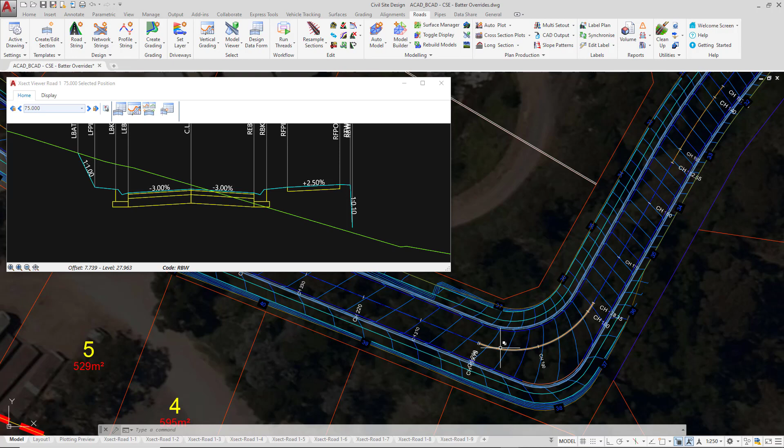Now, what we'd like to say is that between chainage 190 and the very end, we would like to have, instead of a 1-in-1 slope, 1-in-2 instead. This is really just to show you how this particular entry would work.

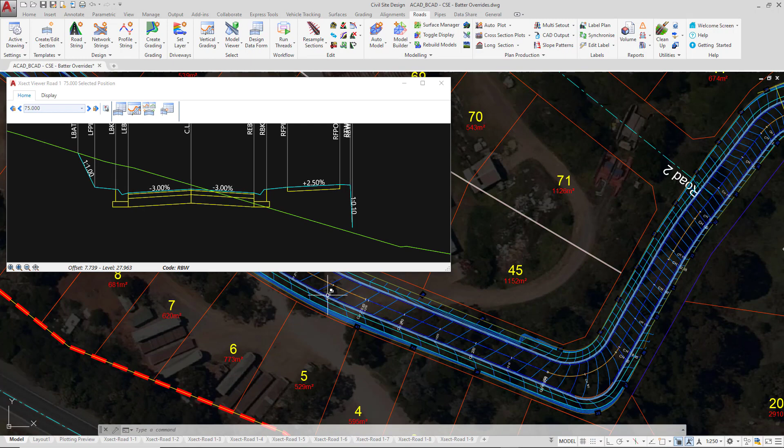So what we're going to do is make sure that we've got a cross-section window open somewhere within that vicinity. So I'm going to open up a cross-section window at chainage 240. If at any point you want to open a cross-section window quickly without having to go to the pull down, there is a picker option here which will allow you to pick a location on screen.

So I'm going to go ahead and do that and left click just ahead of chainage 240. You can see there we've got a cross-section open, and again make sure you can comfortably see what is happening.

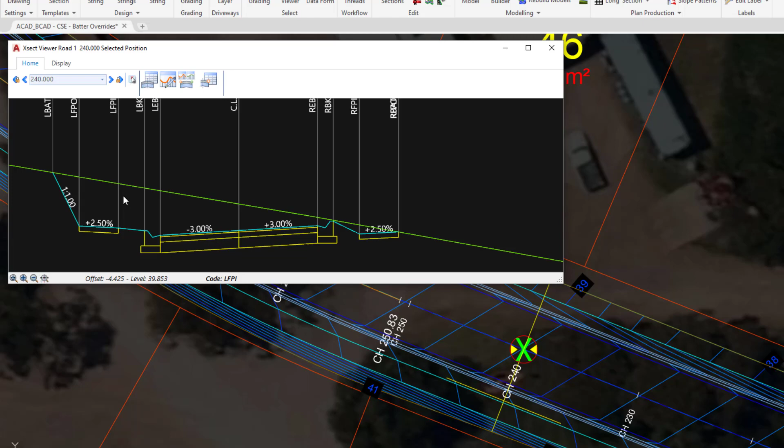Because we're adjusting the left-sided batter, we're going to right-click anywhere on the left side of the template, add a batter override, and then click on Insert Slope Batter. Let's complete the form as shown.

Let's have a look at what we've just added. So we've put in the chainage range, and we've said that the change is going to be on the left-hand side. The cut or fill slope at chainage 190 will now be 1-in-2. You'll notice that the end left cut and fill slopes are set at 0.

This doesn't mean that by the time we get to chainage 591 we'll have a 0 slope, because we have picked the box which says true. To prevent the need for duplicating information, we have allowed you to have what's known as constant slopes. So constant slopes true means maintain the 1-in-2 in cut and fill all the way through this particular chainage range.

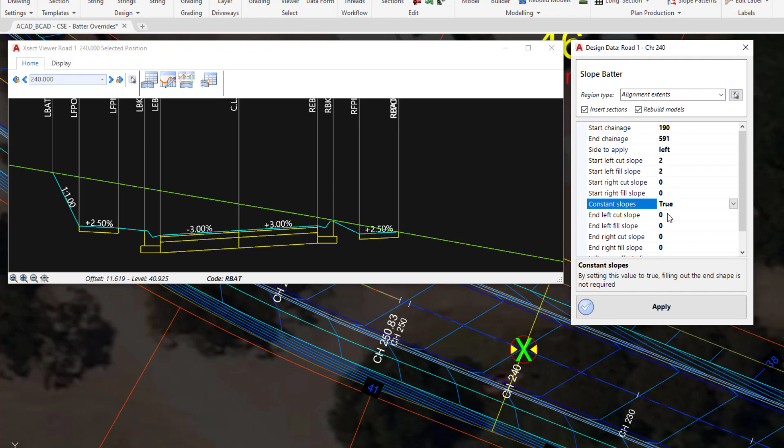If we chose false, we would need to fill in the end cut and fill slope. You can have varying slopes, so we could start at 1-in-1. This would actually match the current slope at 190 and end at a different slope, so you can actually create a transition. For the time being, let's click on Apply.

You'll see the cross-section has now updated to show the 1-in-2. Again, a good reason why you would have the cross-section window open, so you can validate what you've just done. In the drawing environment, you'll also see that we have the updated batters. Let's now have a look at the change in Model Viewer.